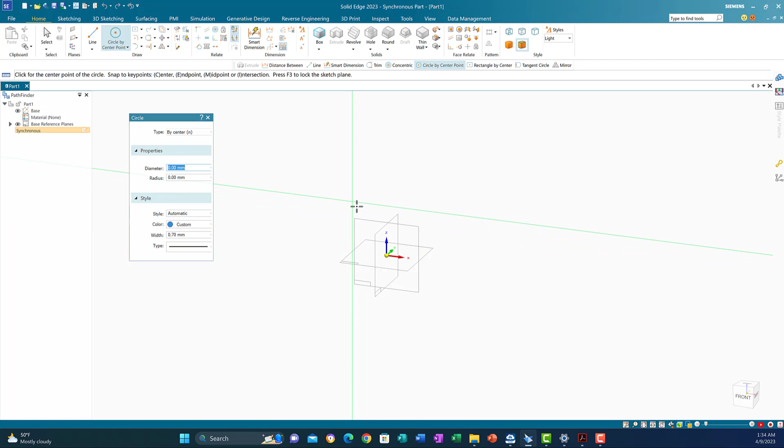The first step is I'm going to lock myself to the front plane. So when I move my mouse to the line of the front plane, the lock will show, then I click on the lock. If you look at the upper right corner, you see the F3 means I am locked to the front plane, so any drawing will be on the front plane.

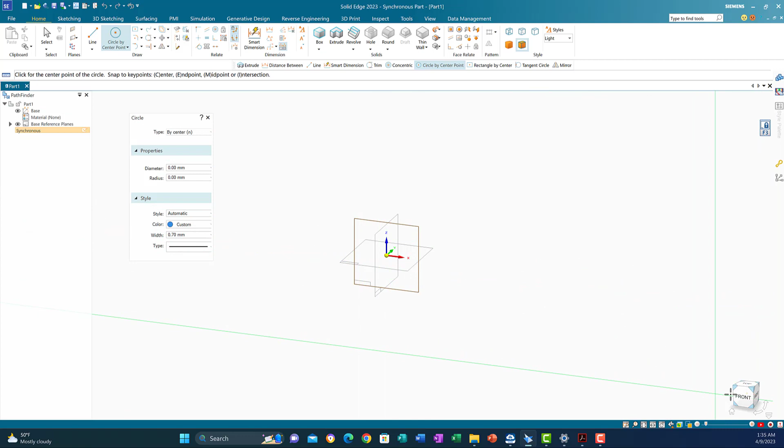So let me go to the front from the cube. I'm going to click on the front plane and start the first diameter. The first diameter is 52, so I'm going to put 52 and put it exactly in the middle here.

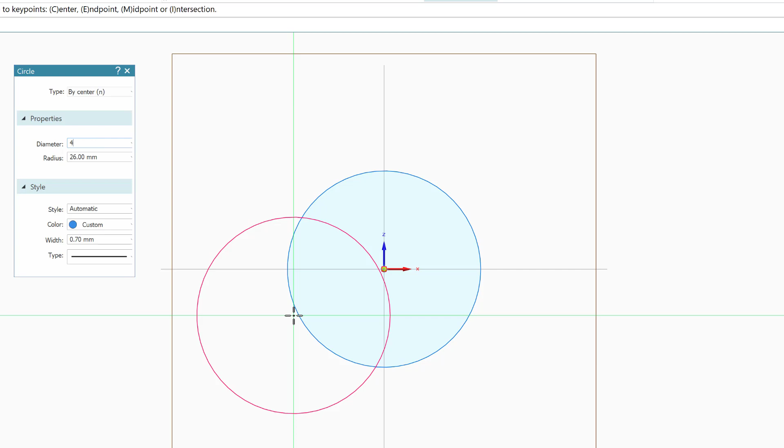And the next diameter is 46, put it exactly in the middle again. And the third diameter is 24.

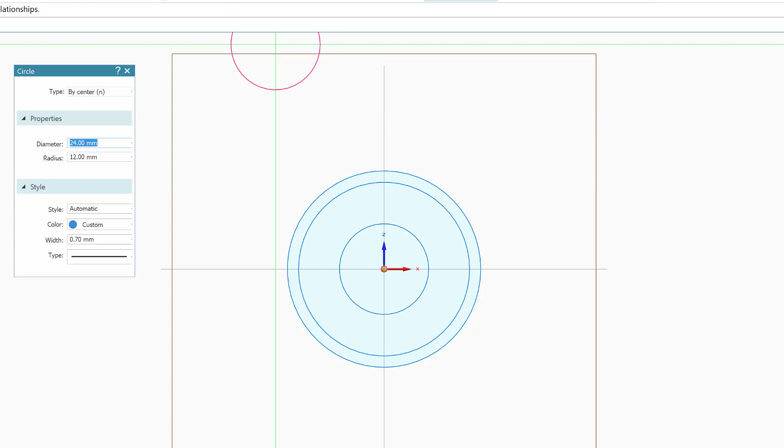Just to make sure to lock every other dimension so it doesn't change before we forget, we're going to get this dimension here - this should be 52, correct? So 46, that's fine. And the last one is 24.

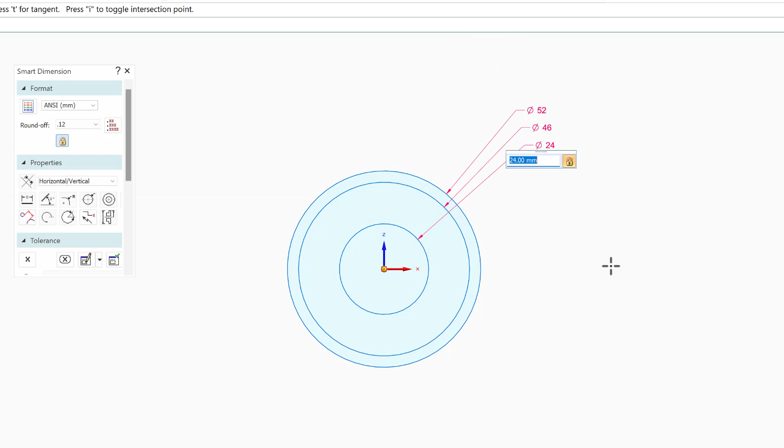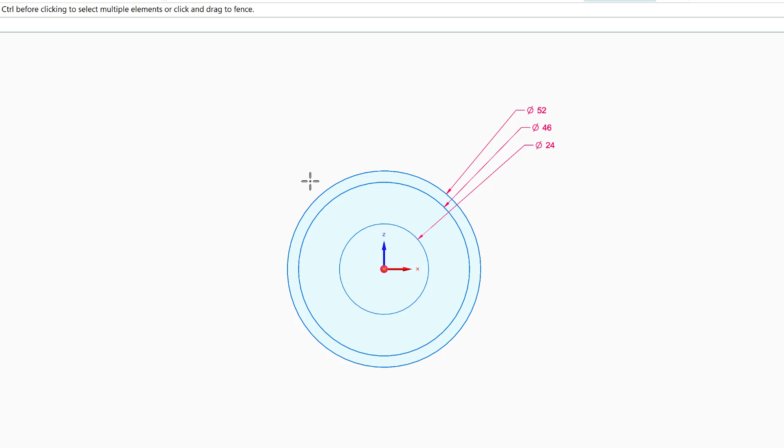The next step is I'm going to move it up. Let's make them also concentric, so I'm going to click on the concentric relationship and click on the outer circle to be concentric with the inside circle, and then the other one concentric with the center, the inside circle. So all of them are concentric now.

So let me move them up, and I'm going to start drawing the other circle in the bottom here. If you look carefully, I'm going to draw these circles: the inside circle 32, then 46, then 52. Okay, so let's do that.

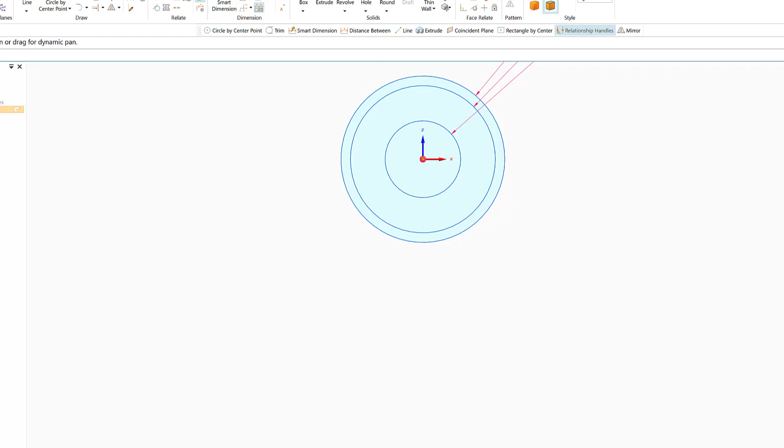I'm going to go to Solid Edge and start circle by center again. The first circle is 52. To make it in the same vertical line as the center of the circles, I'm going to click on the circles, and when I see the dashed red line, I'm going to click on this dashed line here. This means they are on the same vertical line.

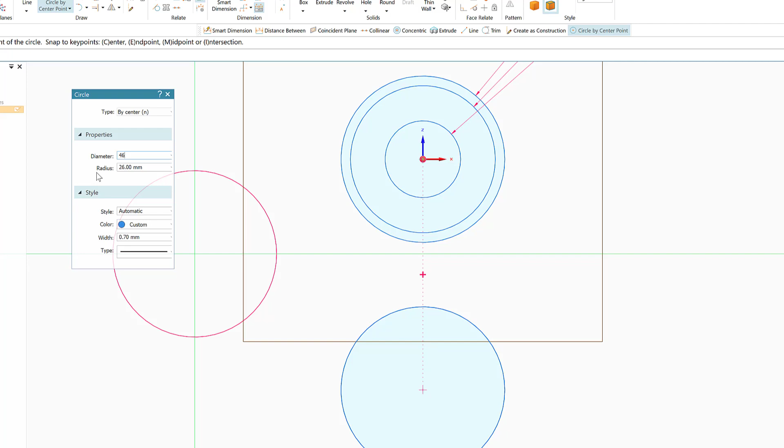The next circle is 46. Go to highlight the circle and go to the center of the circle - when you see concentric, you click. The third circle is 32. And again put it exactly in the center here.

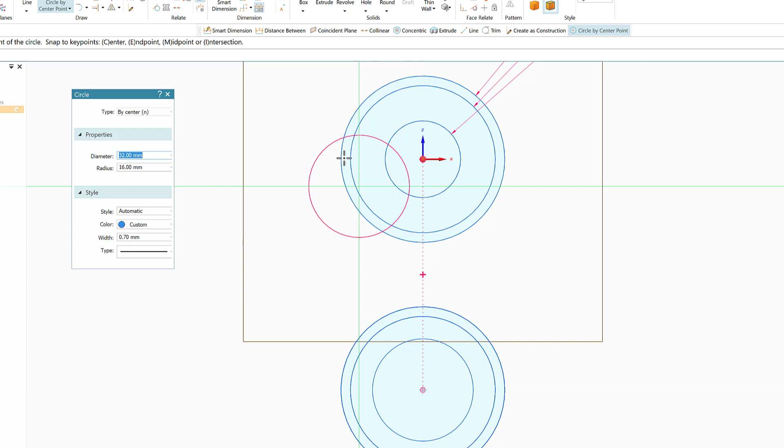Now let me lock the dimension. I'm going to put the dimension first - this should be 52, this should be 46, and this should be 32.

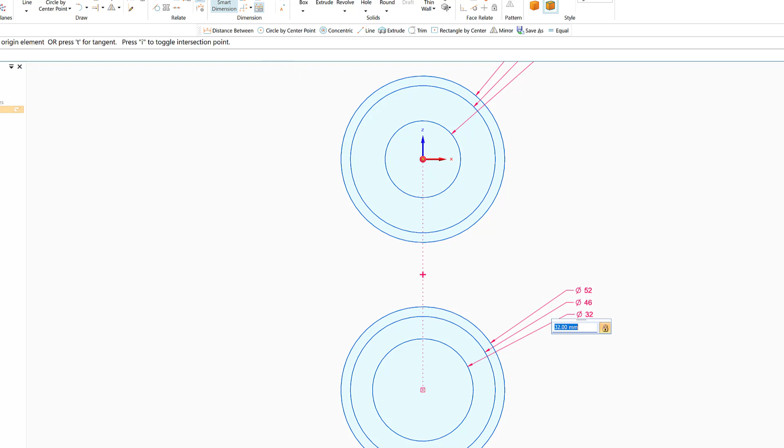Very good. Now I need to set the distance from the center to the other center, which is supposed to be 76. So I'm going to use distance between, horizontal vertical - make sure this is horizontal vertical. I'm going to go from the center of this circle to the other center of this circle, so I need this one to be 76. I'm going to put 76.

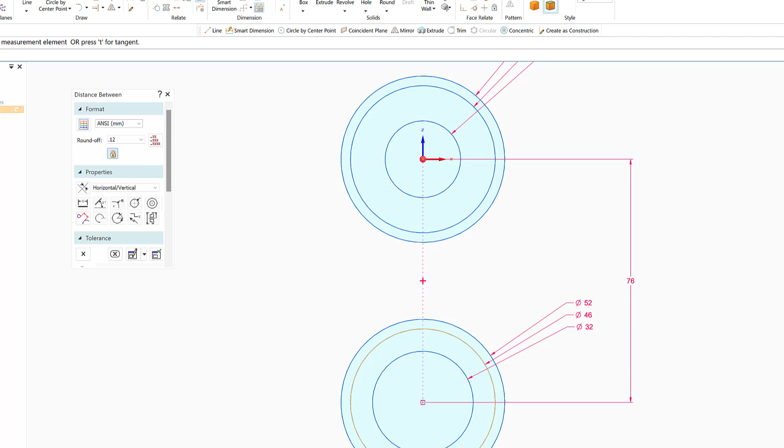See, everything moved together. So far so good. Okay, now let me move it to the right. They give me more room so I can draw this part here.

I have another two circles here. 32, 16 at a distance, 72 from the center to the center. Okay, so let's do that. So I have 32, 16. It should be in the same center line, along the horizontal line.

Okay, so let me put a solid edge. The first circle by center is 32, so I'm gonna put 32. Enter.

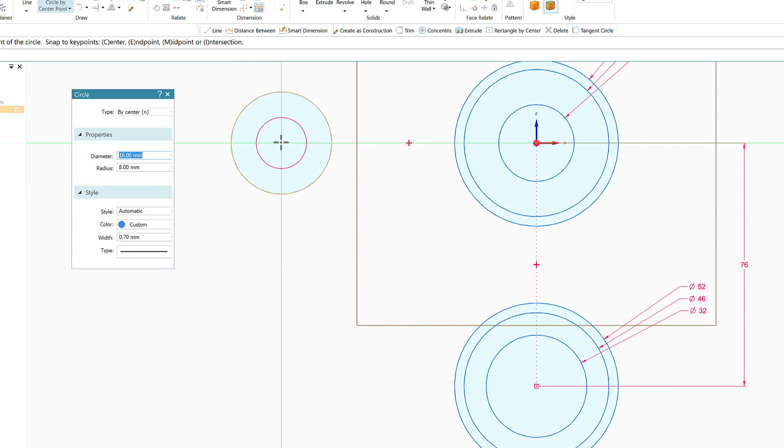Highlight the circle now so I can see the line when they are aligned. I'm gonna see the dashed dotted red line, so when I see it, I'm gonna click. Okay, the next circle is 16. I'm gonna put 16 and go highlight the circle so I can reveal the center. Then I'm gonna click when I see it's concentric.

Okay, so now let me make sure about the dimension, lock the dimension. So this should be 32. Good. And this one should be 16. And I know they are aligned on the same line because I have this dashed dotted red line and the X here. Now the distance from the center here to the other center here is...

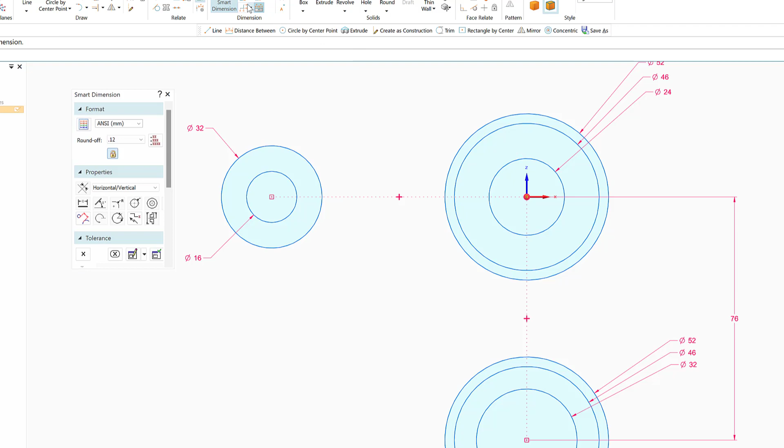72. So I'm going to get the X distance from the center of this circle. Should be horizontal vertical here. So I'm going to click on this circle and then click on this other circle here, and this should be 72. I'm going to make it 72. Enter. Very good. So everything moved together.

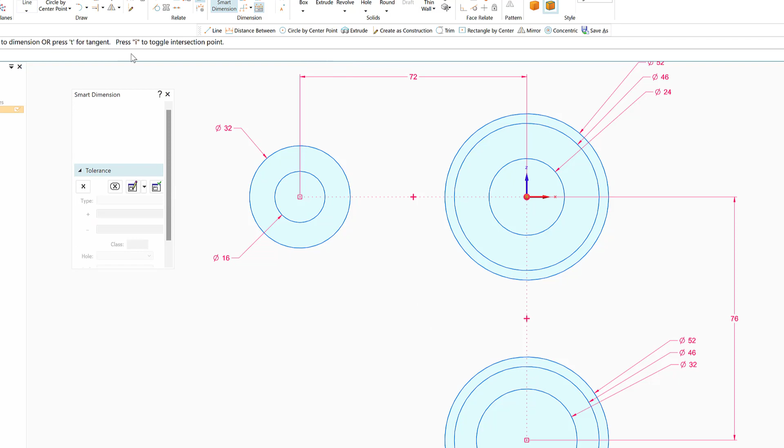So far we were able to get these concentric circles. Now the next step, I need to connect a line. Let me start with this one first. Okay, that's good. So I'm going to start a line.

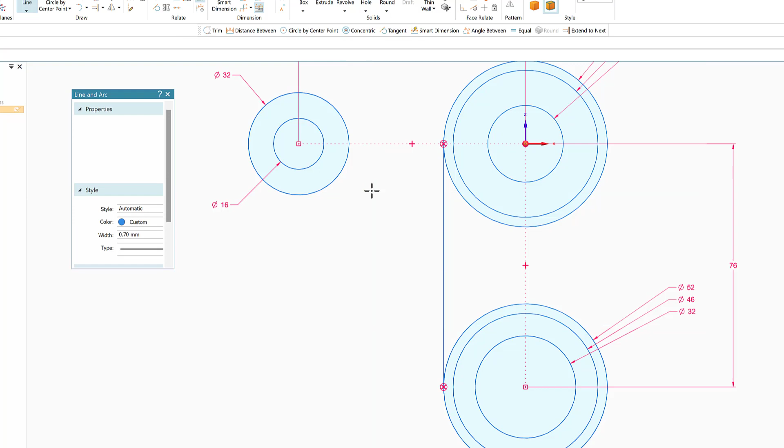I'm going to be tangent from this circle to the other circle here. Once I see it is tangent and touching, when I see the two symbols, I'm going to click, right click to get out and escape. I will see a circle with an X in it, and another circle here with an X. It means it has been drawn right, tangent to both of them.

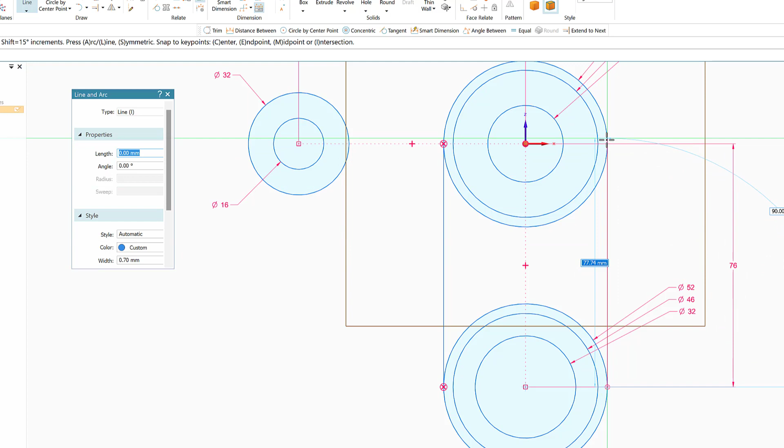We'll do the same to the other side. I'm going to click at any point, and then I'm going to move up till I come tangent and touch, the two symbols. I'm going to click, right click to get out and escape, so I can see. Now it should be a circle with an X in it, means it is done right. Okay, now let's do the other.

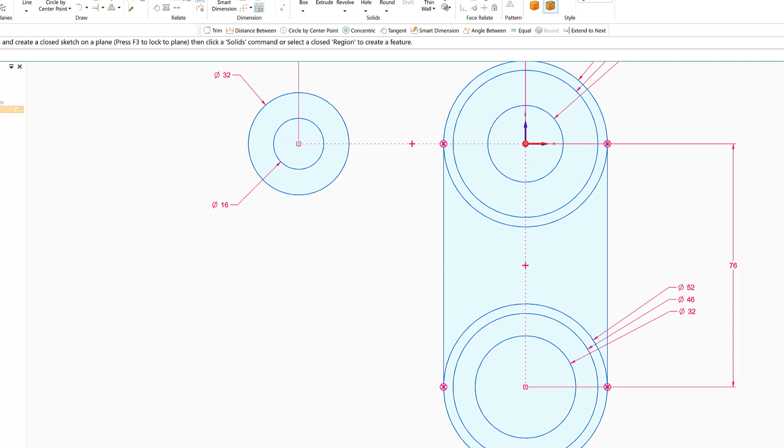So I'm gonna move this one down a little bit, use the handle. Okay, now I need to draw a line horizontal. How much? 34. So I'm gonna get a line. I'm gonna touch here. Oh, sorry, no. Touching the circle. Click. So now it's gonna move with me.

When I see it horizontal, I'm gonna type the distance, which is 34. I'm gonna put 34. And once I see this, the angle, which is 180, I'm gonna click again. Okay, so I got this line horizontal, 34, and then another line vertical.

How do I know vertical? When I see minus 90, it means it's going 90 vertical, and this distance should be the same thing, which will be 52. So I'm gonna say 52. Very good. And again, enter.

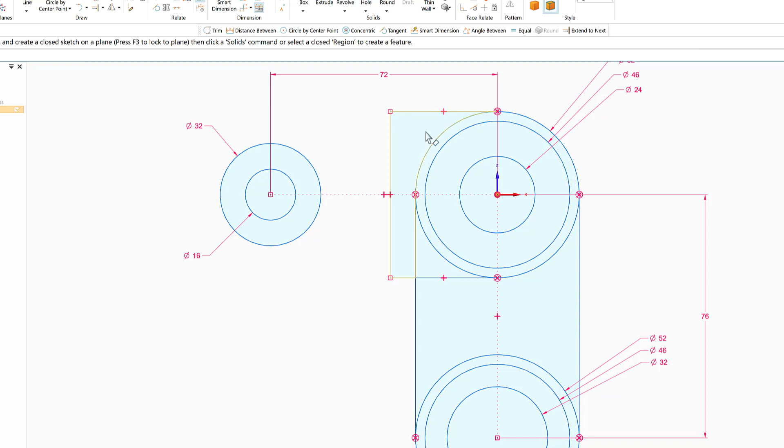And then go horizontal till I touch the circle here. When I see the two symbols, I'm gonna click, and it should be 34. And you can see it is 34, means everything is all right. So right click to get out, and escape to get out. And this way I have the circle with an X. Circle with an X means it is tangent.

Now let's go to the other side. I'm gonna come to the circle here, get a line, come to the circle here near to the top. I'm gonna move, it's gonna move with me, and then I'm gonna draw it horizontally. When I see horizontal and touching, I'm gonna click, which should be 34 from this 38. That's good, that's correct. So now right click to get out, and then I'm gonna do the same thing with the other one here.

So it's going to move with me. I'm going to try to go horizontal till I touch this one, then click. It should be 38. Yes, correct. Right click to get out. So I succeeded in drawing all the sketch in this one.

Now let's start doing some cleaning. I'm going to click on the trim. I don't need these two lines, so I'm going to trim this.

Then the next step, I need to draw a line here. Let me go back. You see this line, it's 34 from the center here. So I'm going to draw a horizontal line at a distance of 34.

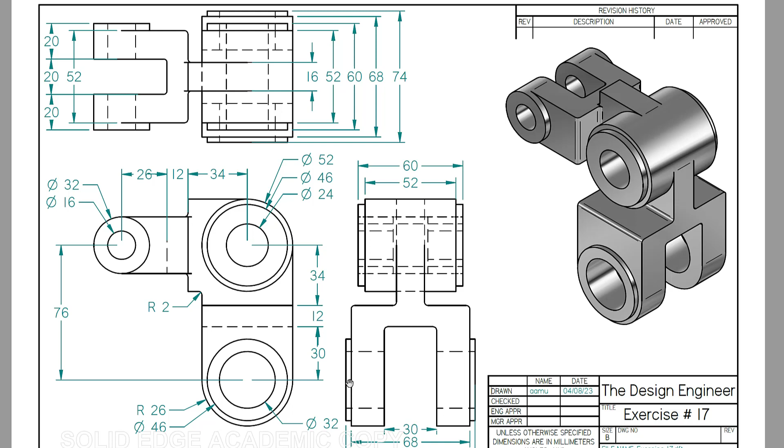So now let's go to the Solid Edge. I'm going to get a line, choose any point, and draw a horizontal line. When I see it is horizontal, I click, right click to get out.

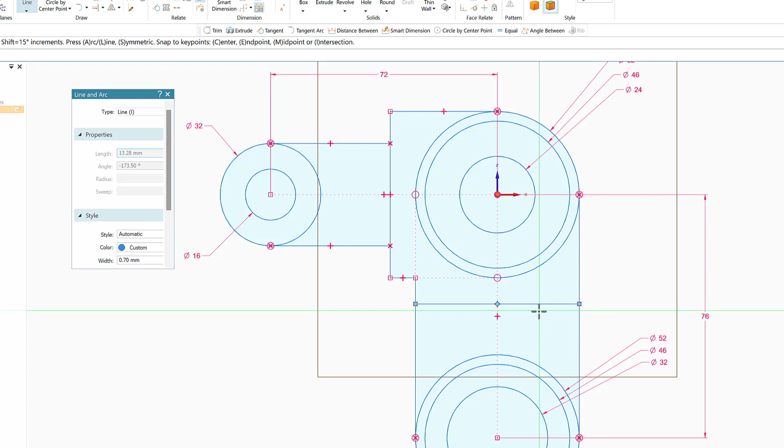Now I need to measure the distance between the center of the circle and this line. Should be how much? It should be 34. Oh man, it's almost 34. So I'm going to put 34. Enter. Okay, so we got this one, we got the other one.

So now we are in good shape. The next step is we're going to start the extrusion. Okay, now the line, okay.

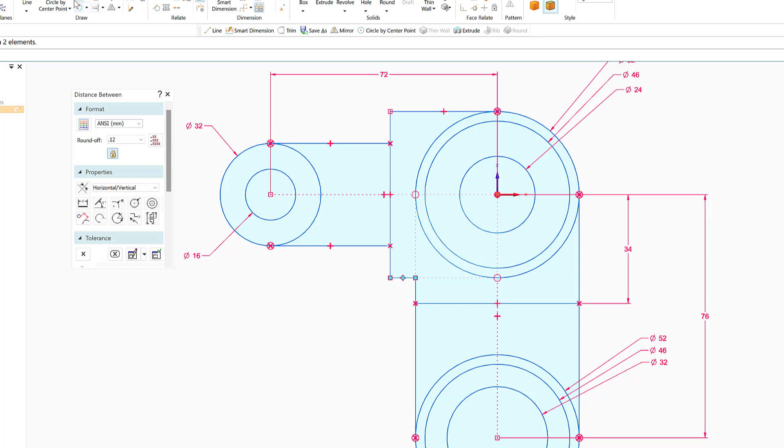The first step is we need to make the curve here, so let me do this curve fillet. I'm going to click on this line. Fillet, how much? I'm going to put 2 millimeters. 2, enter. And this is for this edge here, no, for this line here, and here. So we got the curve.

Just to put it in the corner here. If you are not able to locate the corner, you can click on both lines, then it will work. Now we're done with the sketch.

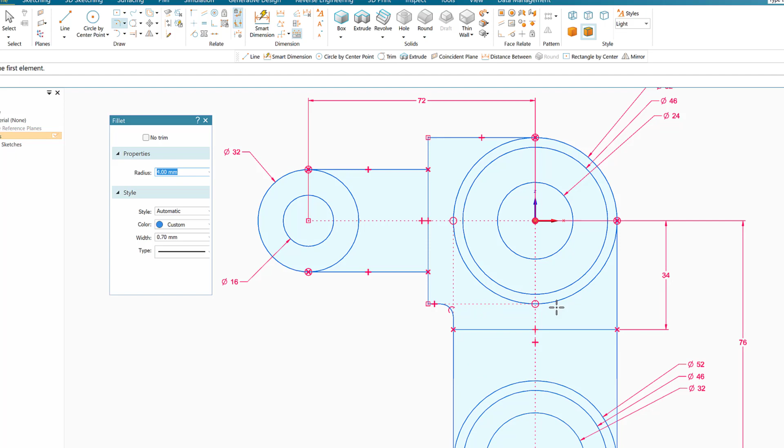The next step is I'm going to do the extrusion, so I'm going to go home and start the extrusion. The first extrusion will be the one here that looks like a rib.

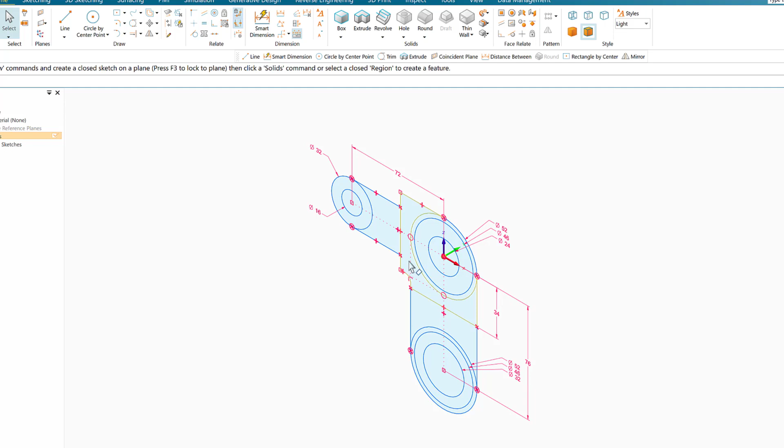So I'm going to choose select, because this is the quickest way. I'm going to click on this area here, and make sure that it is symmetry plus, that's fine. I'm going to click on the arrow, and it's going to be symmetry.

And how much? No, it's not one direction. I needed symmetry, so I'm going to click on this one, symmetry. Okay, so I needed symmetry. Now it is symmetry. Distance is how much? It's going to be 16, so I'm going to put 16.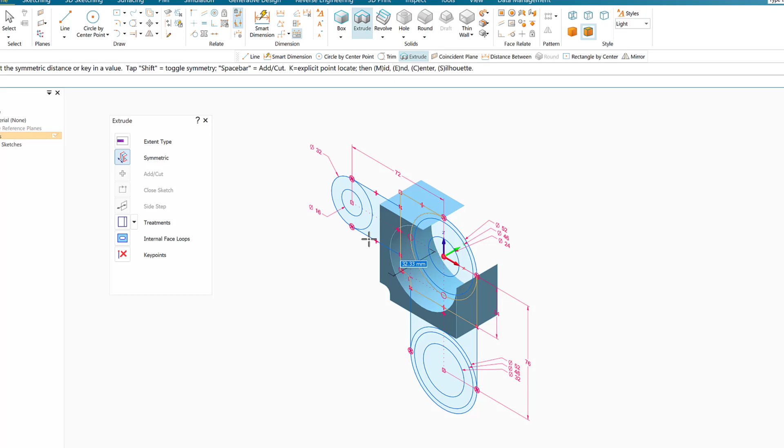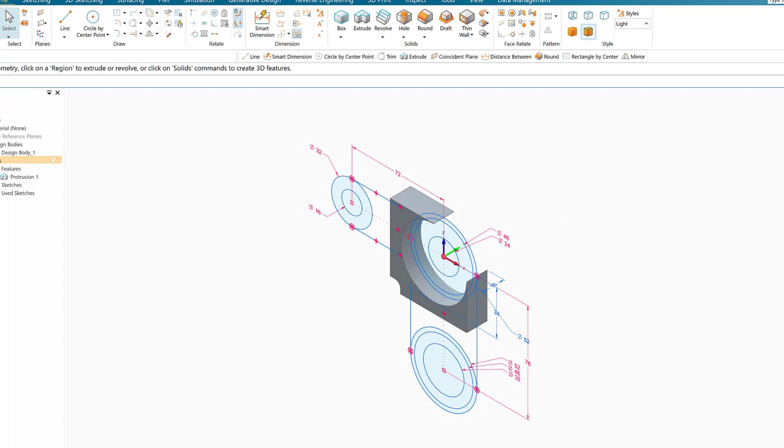Okay, so we got this one. Now the next step, I want to do this area here. Let me zoom because I'm not able to locate the point inside the area, so I'm going to zoom like this.

Now I can see that. So I'm going to say select again, and I'm going to put the mouse inside between the two circles here. If I click inside the two circles, it will pick the right area. So I'm going to click, means symmetry plus. That's correct, so I'm going to click on the arrow.

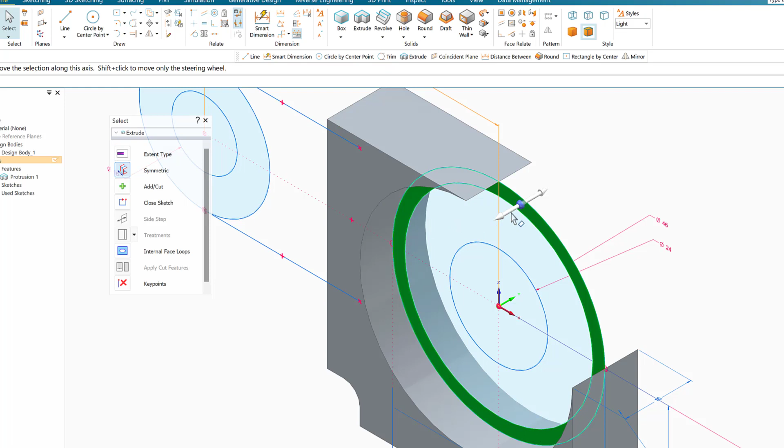It means it's going to extrude symmetric, and how much is it going to be? 68. So I'm going to put 68.

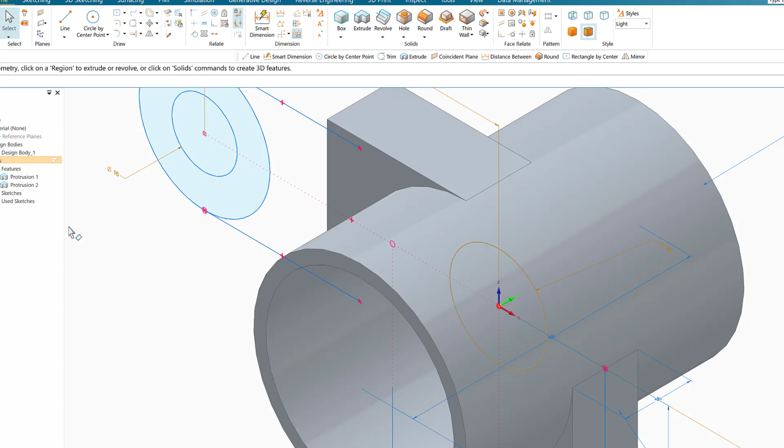Notice something, the sketch disappeared. So what I'm going to do is click on the used sketches, get the last sketch, right click and say restore. When I restore the sketch, it brings me back the drawing.

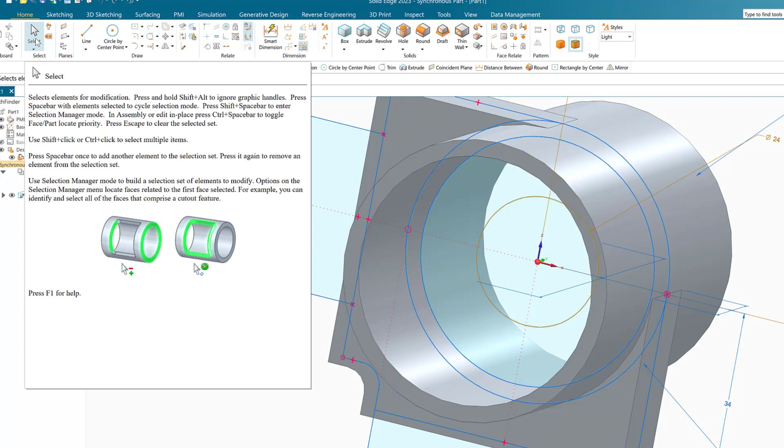Now I'm going to move it a little bit so I can reveal the circles, and then I'm going to click again on select. Select is highlighted, so I'm going to click on this area here. You see the arrow, it should be symmetric, so click on the arrow.

And make this one symmetric. How much is it going to be? 74. Enter. So this way I was able to get the top part here, as you can see. Very good, okay, now let's do the other ones.

Okay, so I'm going to move this one. Let me get the pen. I'm going to move this one a little bit like this. Look, okay, that's good enough. I want to extrude.

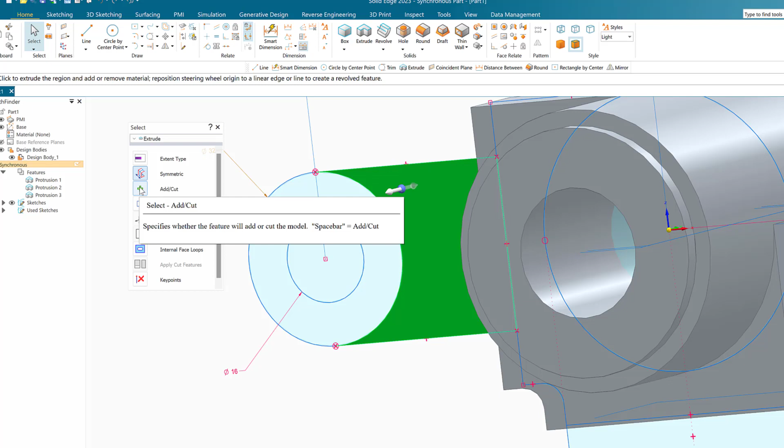So I'm going to get on select. I'm going to click on this one, and I need this one symmetry. Yes, symmetric, and plus. Click on the arrow, and I need this extrusion. How much? 52.

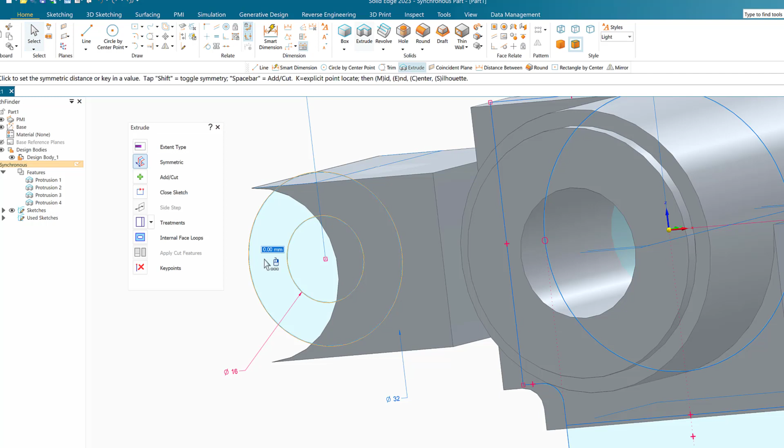Now the next step, I'm gonna click on the area between the two circles. So I'm gonna extrude this one, the area between the two circles, and the extrusion should be 60. 60. Enter.

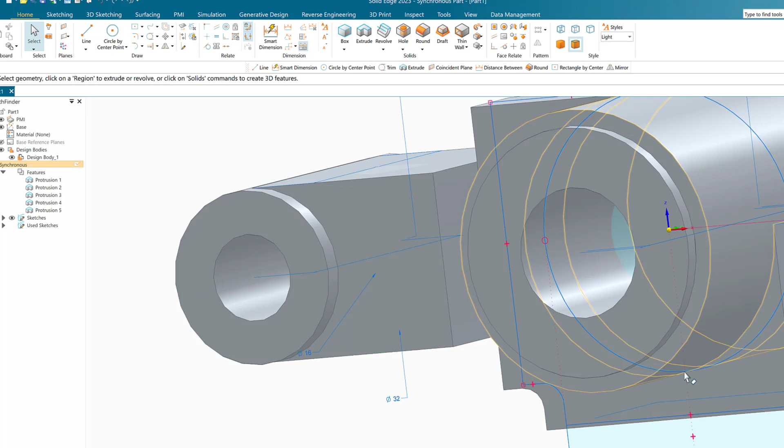Okay, so we got this one, and we got the other one. Now let's move to the bottom part. I'm gonna click on the pan, then I'm gonna go up so I can reveal the other circles.

I'm gonna just make it a little bit smaller by the roller mouse. Okay, I'm gonna click on the area here with the tab. The area, okay, with this one. Okay, I'm gonna click on this.

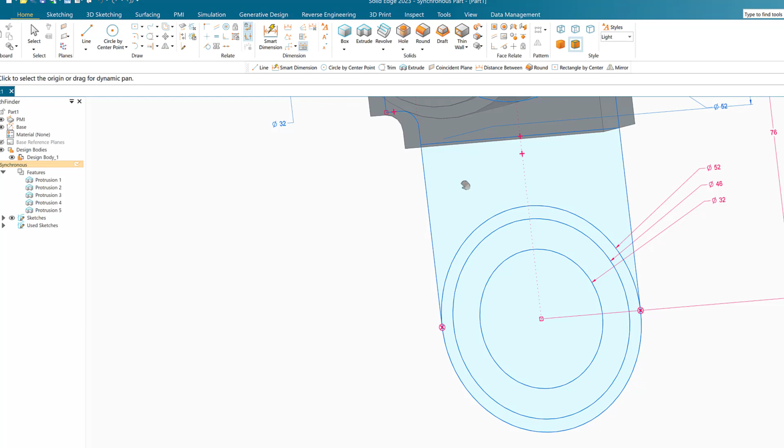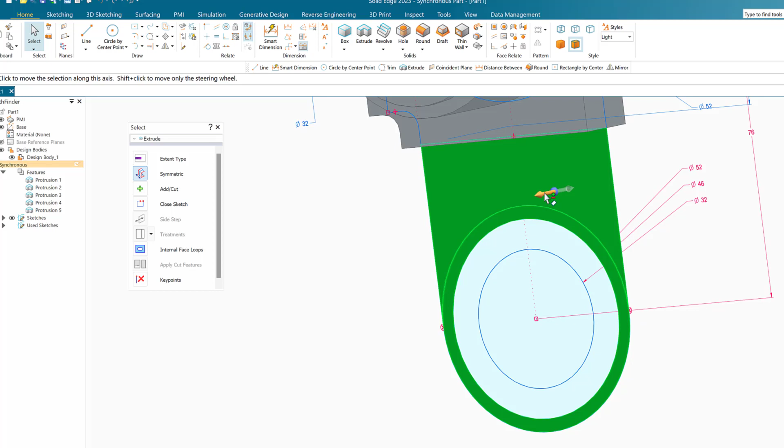I'm gonna put my finger on the shift key, hold it, click on this one, and click on this one too. Then I'm gonna remove my finger from the shift key, click on the arrow now, and this should be extruded.

How much do I need this? 68. So I'm gonna put 68.

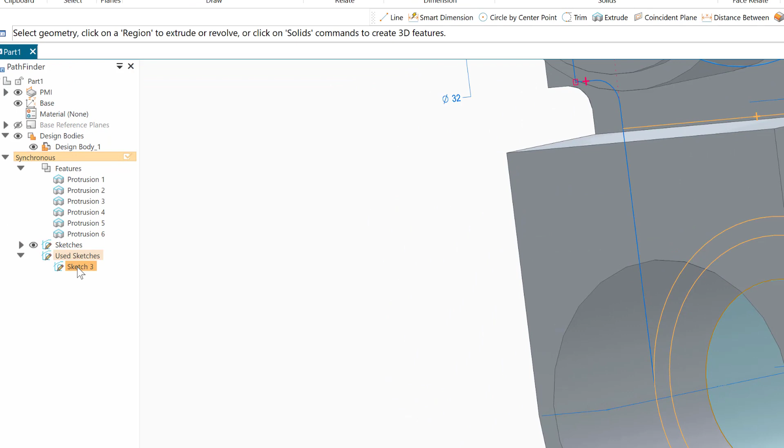Very good. The sketch disappears. So what I'm gonna do? I'm gonna go back, expand this, Used Sketches, click on this sketch here, right click, and restore. When I restore it, the circles come back.

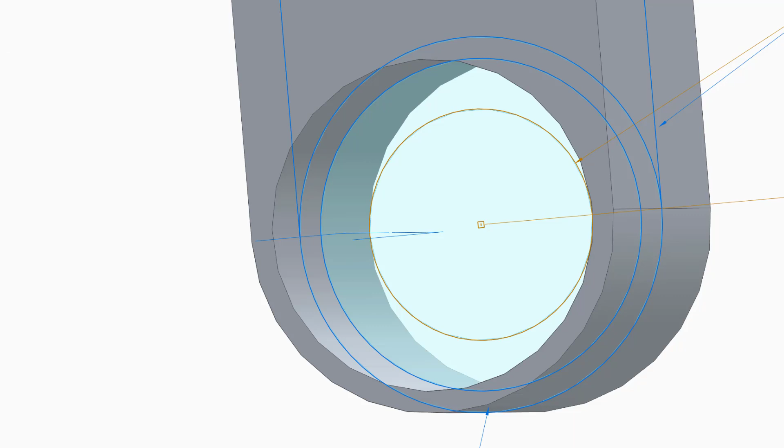The next step is to extrude the two circles inside each other, this circle. So what I'm gonna select again, click on this area. Click on the arrow, make sure it is positive and symmetric, and so on. This is 74. 74. Enter.

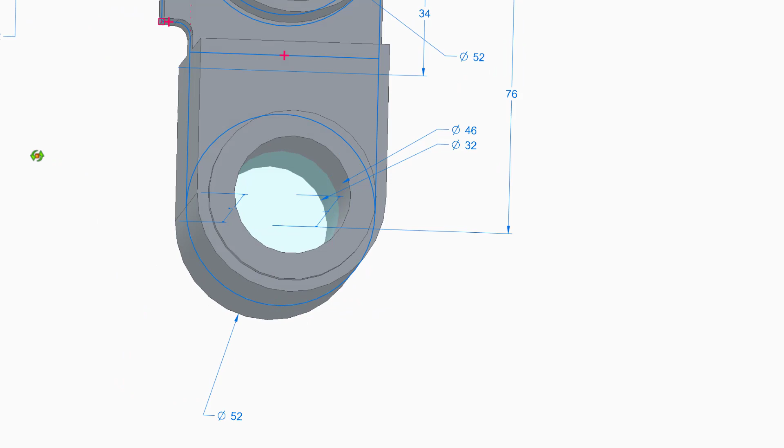Very good. So I was able to finish the drawing. Let me reduce it a little bit. So I was able to finish the drawing. It seemed like we got busy with the other sketches.

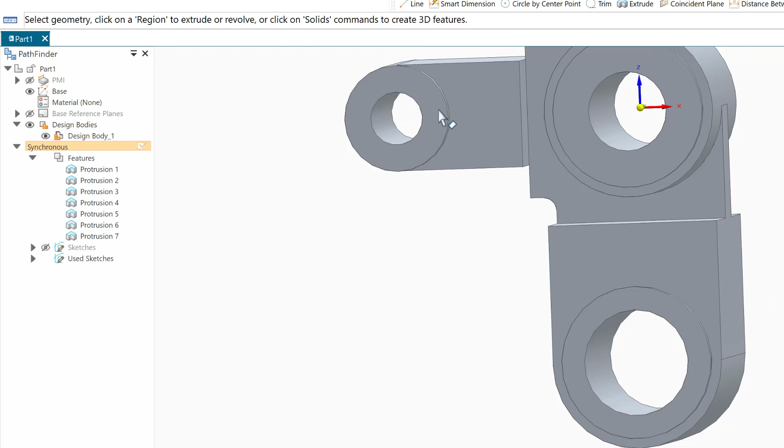So what I'm going to do is hide everything so I can see only the part. I'm going to hide the sketches, click on this one, and also hide the dimensions, which is the PMI. So the only thing left is the current axis, the shape, and the part.

I'm going to click on this one so I can bring it to the center, or you can click on the fit option. Okay, that's good. So here is the shape. So we were able to finish.

The only thing left now is to make the grooves. What kind of groove? If you look here, this groove here and the other groove here. If you look carefully here, this is 30, and from the center here to the bottom is the radius of this circle. The outside is 26, so I have 26.

So what I'm gonna do is mainly I need the groove here to start from 30 here. This distance is 30 to the groove here. So what I'm gonna say is, okay, I need 30, I need to go 30 up, and I'm gonna go 30 down.

So what can I use? I can use rectangle by center, so it's gonna be 30 by 60. So let's do that, let's go to Solid Edge.

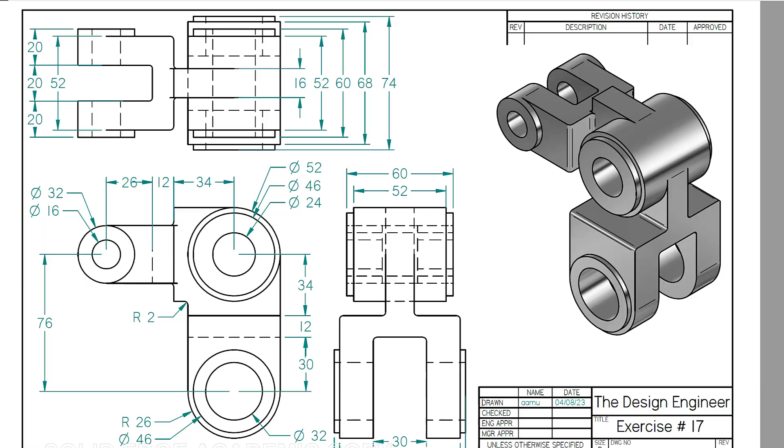I'm gonna get this one, and I'm gonna click on the zoom on the right plane. Okay, so here it is. Very good. So now let me get the rectangle by center tool.

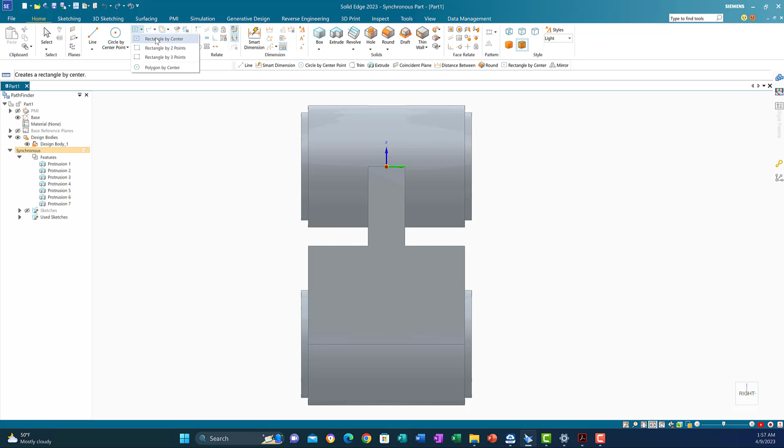Rectangle by center. And I'm gonna say, okay, the width, I'm gonna put 30. 30, it is 30 now, and enter. And then the other one is gonna be what?

If you look carefully here, go back to the drawing. Okay, I need the groove to start at about 30 here. So I'm gonna make it twice so I can cover, and the 30 is gonna cover the 62, the 26, which is more. So that's fine, but at least I got this one correct.

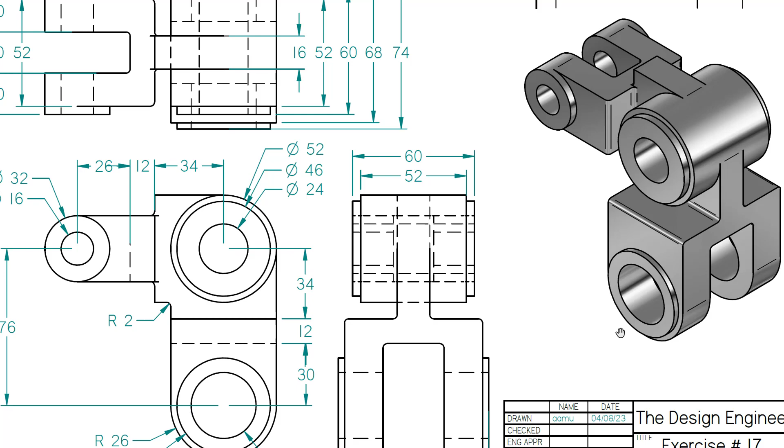So now it's gonna be 30 by 60. So let me go to the Solid Edge, and put the height here, which is gonna be 60.

Enter. Now first I need to lock myself to the plane here, so I'm gonna click on the lock.

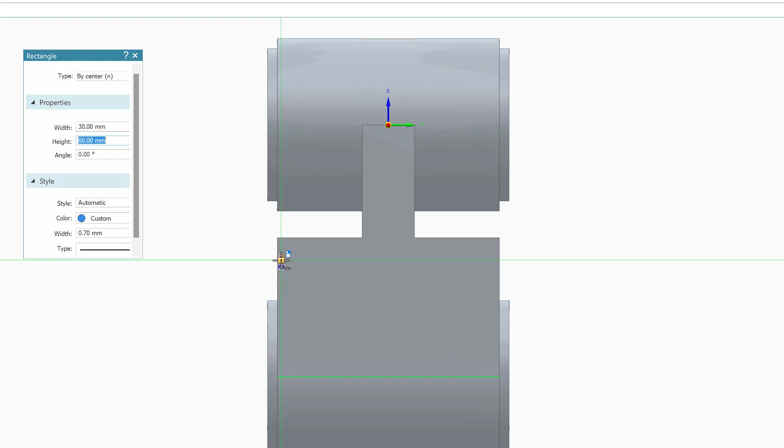Now I have the shape. I'm gonna go to the exact center of the line here, of the inside circle, and in the center exactly of the shape of the cylinder itself. So I'm gonna click on the center, click.

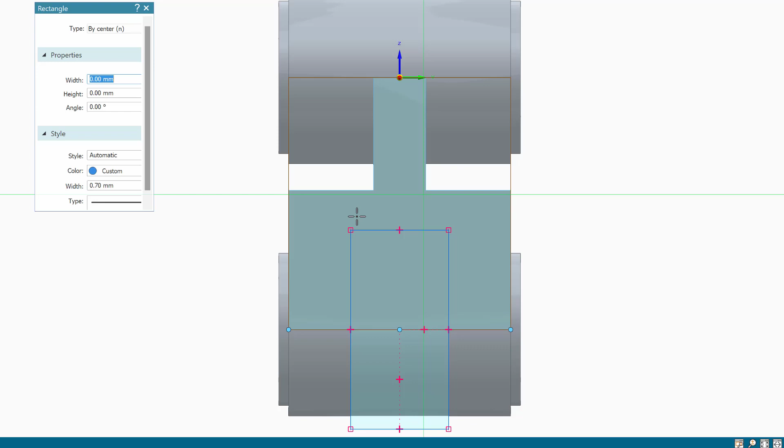Okay, now see, because it is locked to the plane here, this is why everything is highlighted. Let me tilt it a little bit so you can see. So I draw this rectangle exactly in the right place.

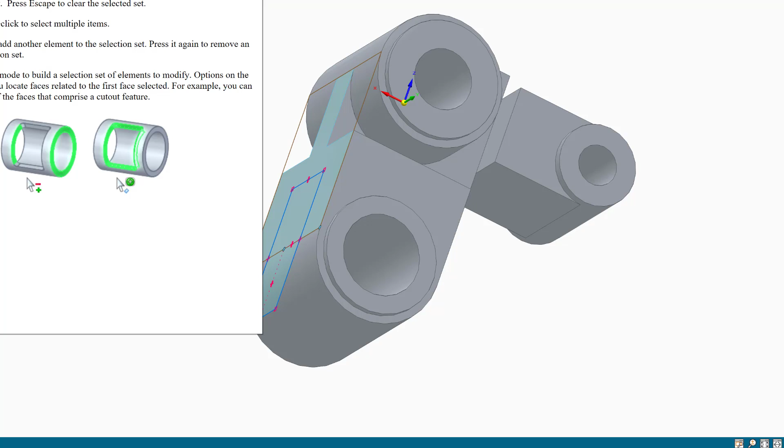Now I need to cut this shape from the part. So how to do that? I'm gonna click on select. No, I'm gonna do it by extrude. Why extrude? Because now I need to select not the face, I need to select a chain. Otherwise I can't do it with select, because select always chooses a face. When you practice you can see the difference.

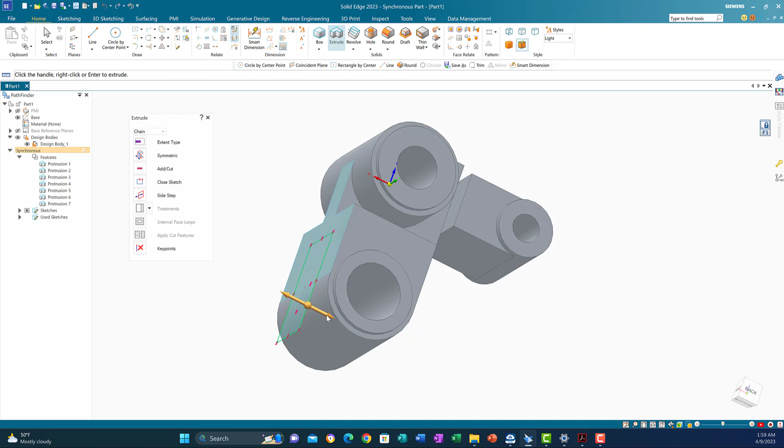Okay, so now I'm gonna click on the chain, and then instead of plus I need it to be cut, and I don't need symmetry because I need to just cut from top to bottom, that's it. So I'm gonna click on the chain, click the arrow to go down, down, down, down, down till I cut everything I need. Now I was able to do the cut.

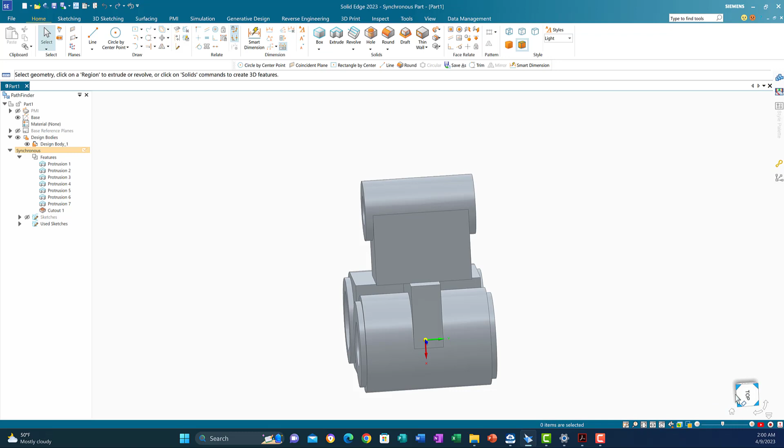Let's do the other one. So I'm gonna zoom to the side, this side is the top plane. Okay, here is the top. That's good, I'm gonna do the same thing.

Let me go to the drawing to see the dimension. The dimension here is 20, starting from here to the center. From the center to the right is 26. The radius here is 16. So if I make 26 twice, I can put it exactly in the center. It doesn't matter, we have extra space, but I need this one accurate at 26 from the center. So I'm gonna say 20 by 52, since 26 plus 26 is 52.

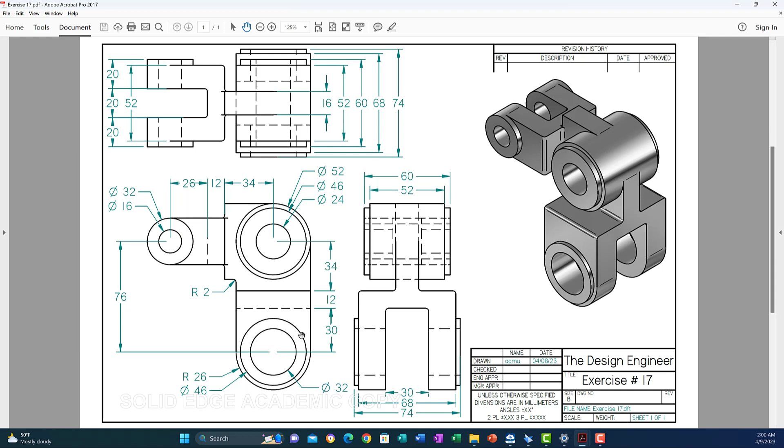So go to Solid Edge, I'm gonna say rectangle by center. The width is 20, enter. And the height is 52, enter.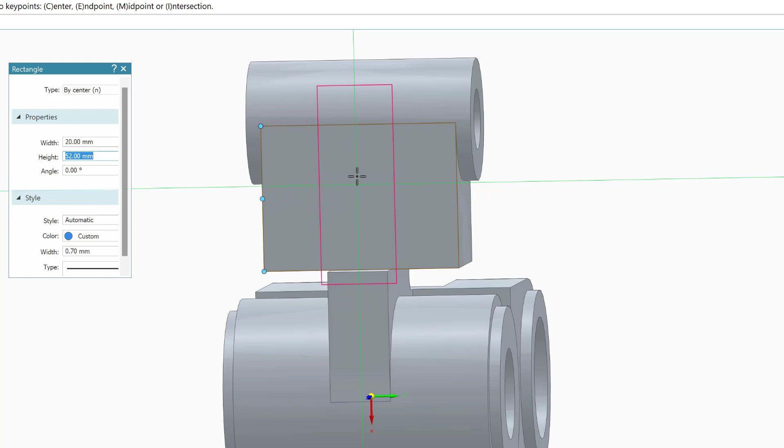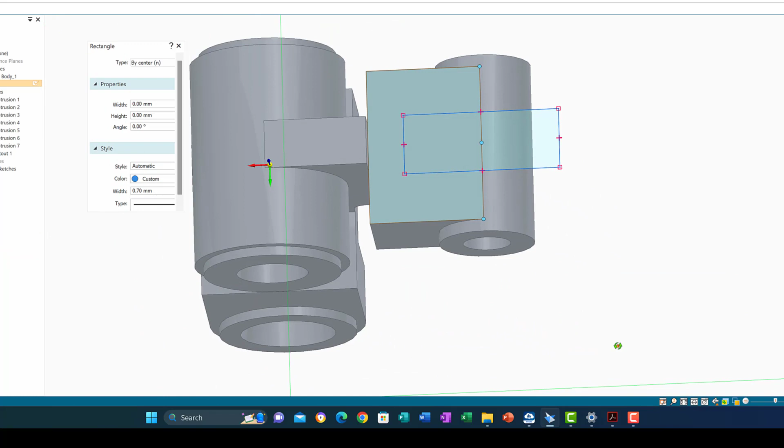Okay, and then I'm gonna lock myself first to this plane, so I'm gonna click on the lock. Then I'm gonna go to the center of the circle, or the cylinder, and go down, which is 26 plus 26 up. That's fine, I have extra. So I'm gonna click again, meaning I draw it here. Let me rotate it so you can see what's going on. So here is the shape.

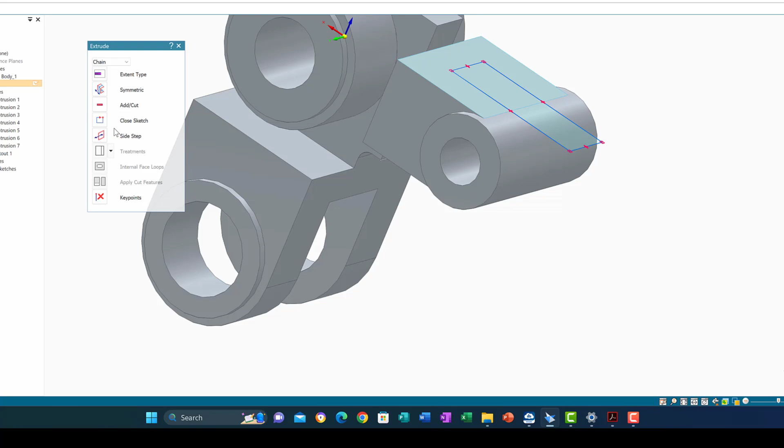What I'm gonna do is extrude, by chain - don't forget it says chain because I don't want to make the same surface. Instead of plus, I want to make it cut. Now I don't want symmetry because I want to go from top to bottom. So I'm gonna click on this chain, take the arrow, click the down arrow, and go down, down, down, down, down till I cut the whole thing.

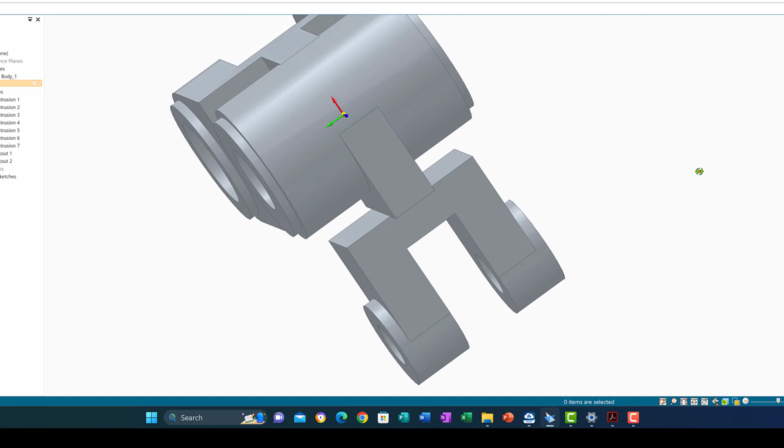It is cut already, went through. Now the cut has been done. It seems like we were able to finish the part. The only thing left is just to make some rounds for the sharp corners.

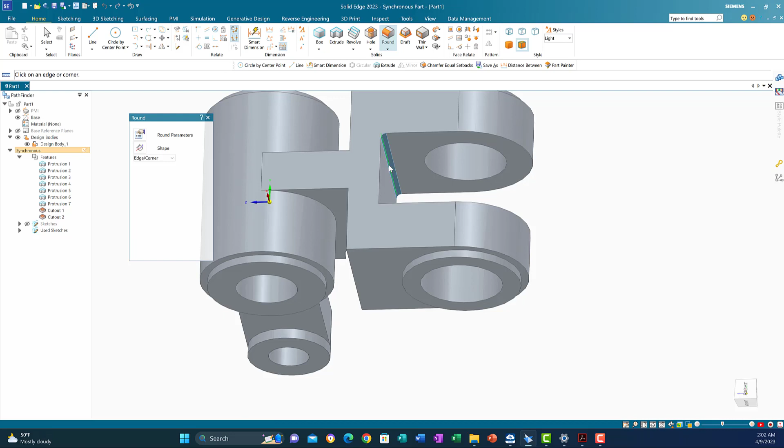So I'm gonna say okay, round. The first one, let me do this one, click on this line here. I needed 2 millimeter, that's good. And the other one, 2 millimeter. Okay, that's good, so we're done with this one.

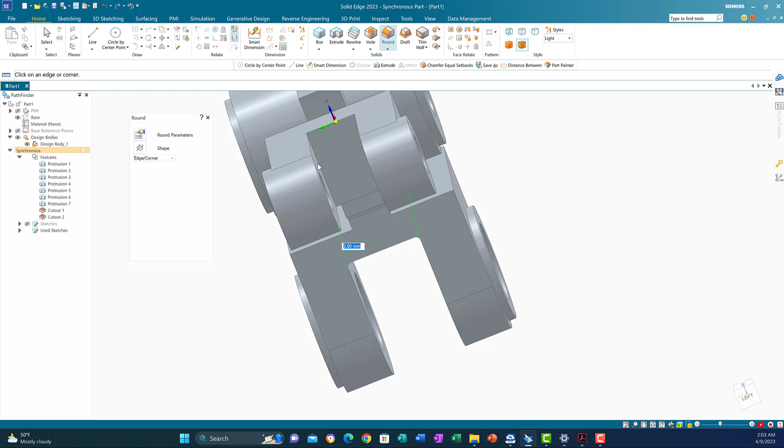Let me do the other one here. Okay, so we'll do this line, and do the other one here. Okay, what else we need, we need to do this line here, this small line here. I'm gonna click only the small line.

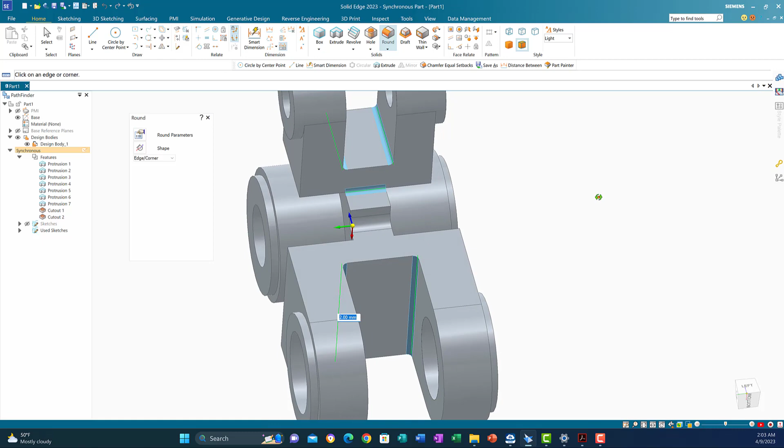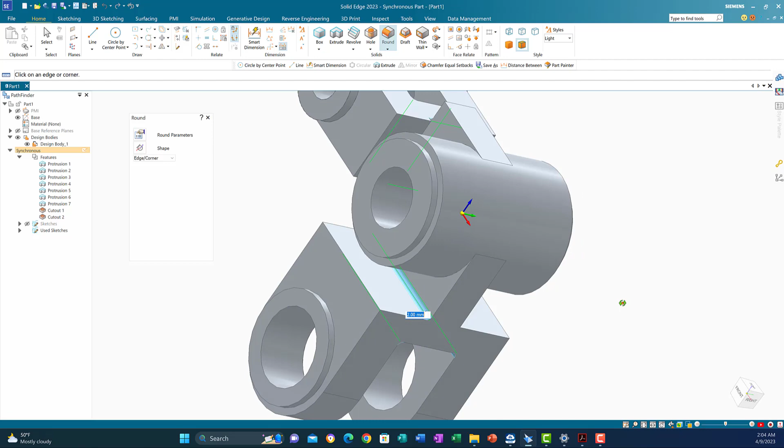Very good, and let me do the other side. Where is the other side? Okay, here it is. So I'm gonna click on the small line. Then what's left is just this line here. Good, and then let's do the other line here. Very good, and this will end the session for this exercise.